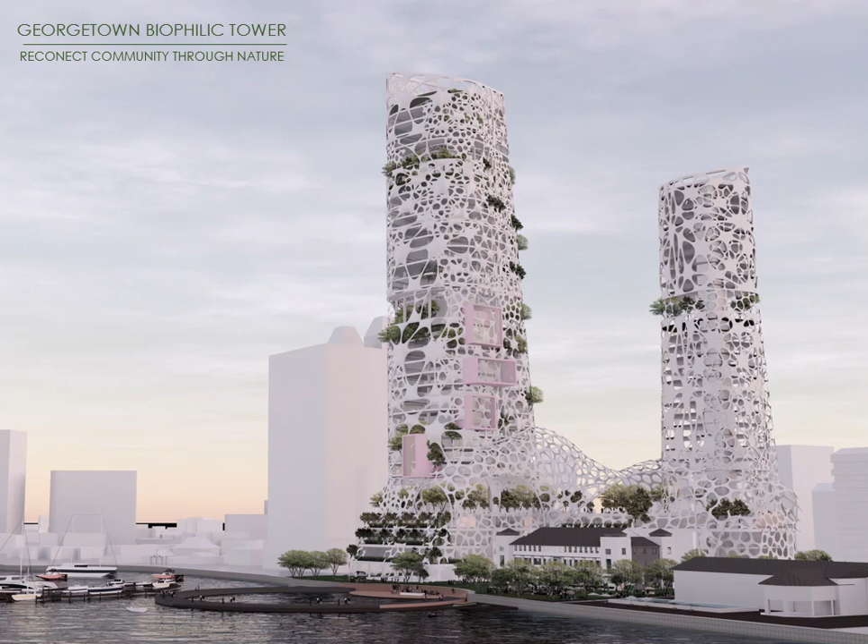Here's a brief introduction about green spaces that I would emphasize later on. High-density developments such as high-rise buildings can provide better local services, but also have more limited and low-quality green spaces, which may lead to a stronger feeling of insecurity and less social interaction than developments with lower density.

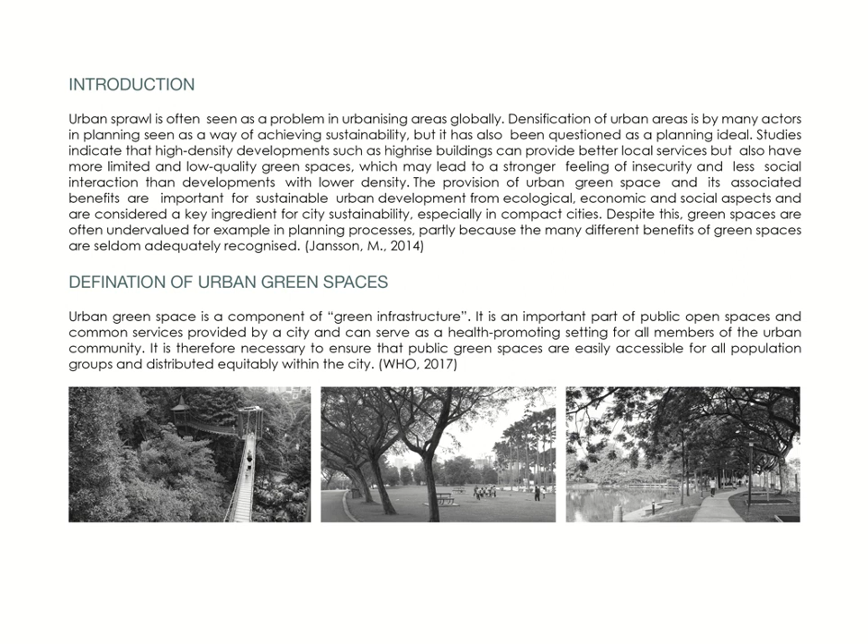Definition of urban green space: it is a component of green infrastructure, an important part of public open spaces and common services provided by a city, and can serve as a health-promoting setting for all members of the urban community. Therefore, it is very important for urban green space to be integrated into the city and as part of our lifestyle.

What's reflected globally is reflected in Malaysia also. In local context, ASEAN green spaces are disappearing fast. Our country is one of the countries globally that is strongly affected by this lack of green spaces.

Next is the local issue in Penang context: urban heat and climate change. Only 0.4% of building use is contributed to public open space. This is a very serious matter that we have ignored so far, the lack of green space in our city.

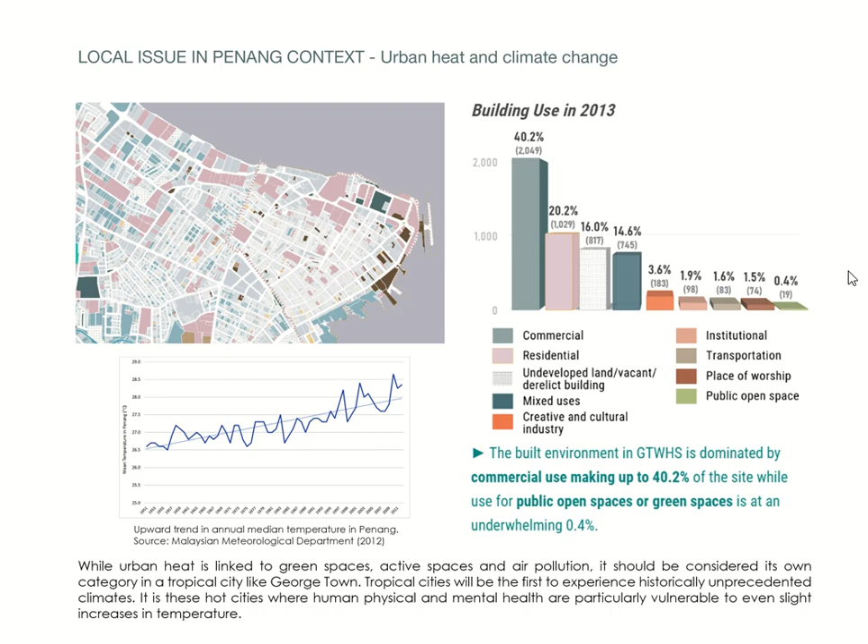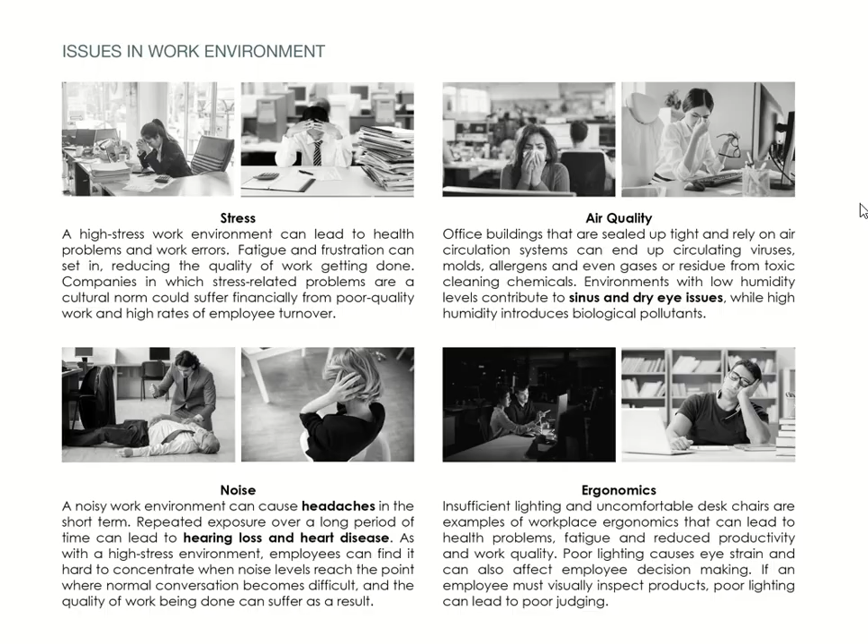Green space in and around office produces healthy workers. We all love green spaces—it is human nature to want to be near nature. As our cities densify and more of us live and work closer together, we understand that green space is a basic need that is in fact in decline in many urban environments.

So how do we improve the work environment? Firstly, encourage transparency, remodeling and redesign, use natural elements, increase engagement, foster teamwork and collaboration, and go for comfort.

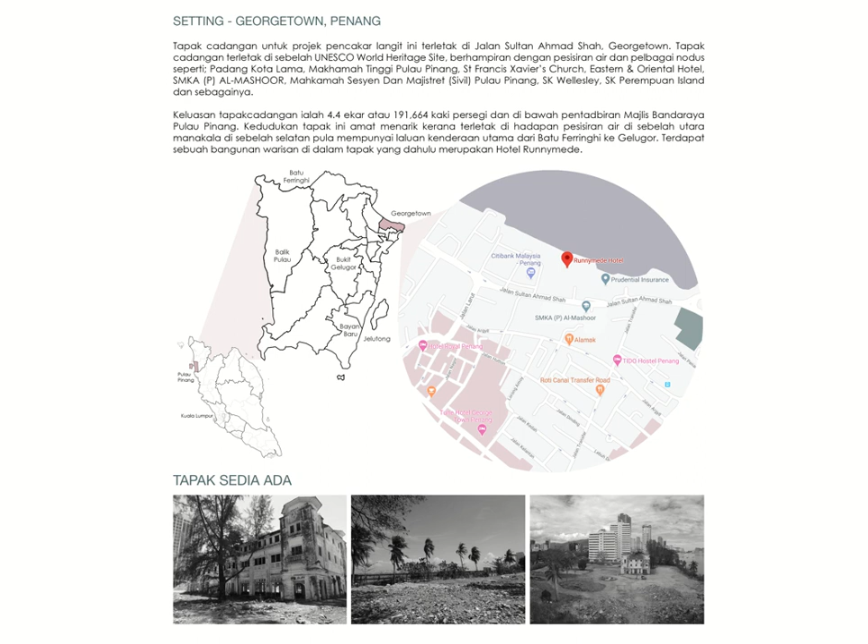This is the setting of our project this semester, Georgetown Penang. It is located between Citibank Malaysia and Prudential Insurance Building, sandwiched between the waterfront and Jalan Sultan Ahmad Shah. These are the existing pictures of the site, including the existing heritage building, Runnymede Hotel.

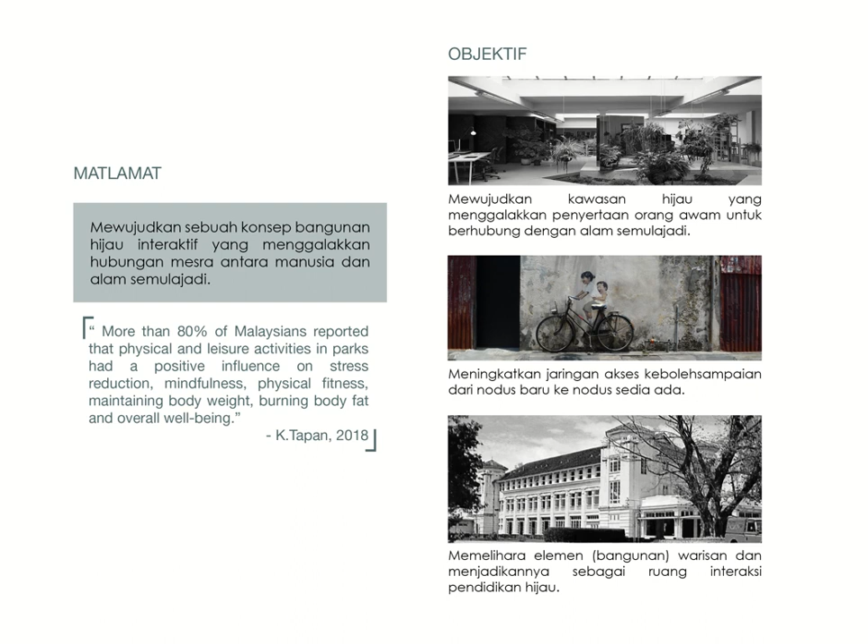So, I've mentioned about the lack of green space and the work issues in the work environment. I thought about how I can solve this true problem—it's by bringing nature into the building.

So what I've come up with is my design concept, Biophilic Tower, by inserting biophilic elements into my design. Biophilia as a concept can be loosely translated as love of nature.

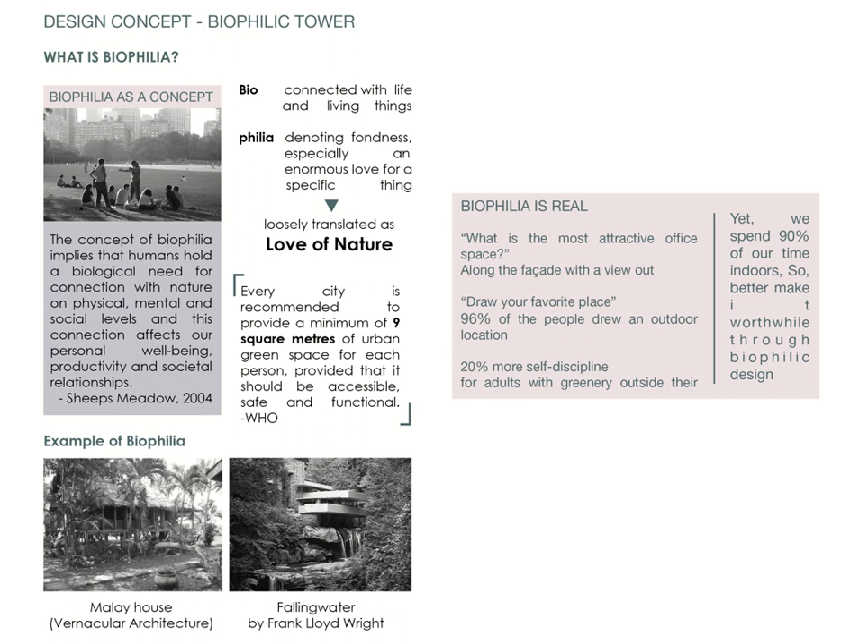Biophilia in an economic sense: there's great economic value in the positive effects of biophilic design on well-being, stress reduction, and enhanced learning. Biophilia can re-engage losses from unproductive operating costs. Some of what biophilic design can do includes healing and improving attention and learning, as well as a significant increase in property value.

People will pay 58% more for a property with a view to water, while people will pay 127% more for a lakefront property.

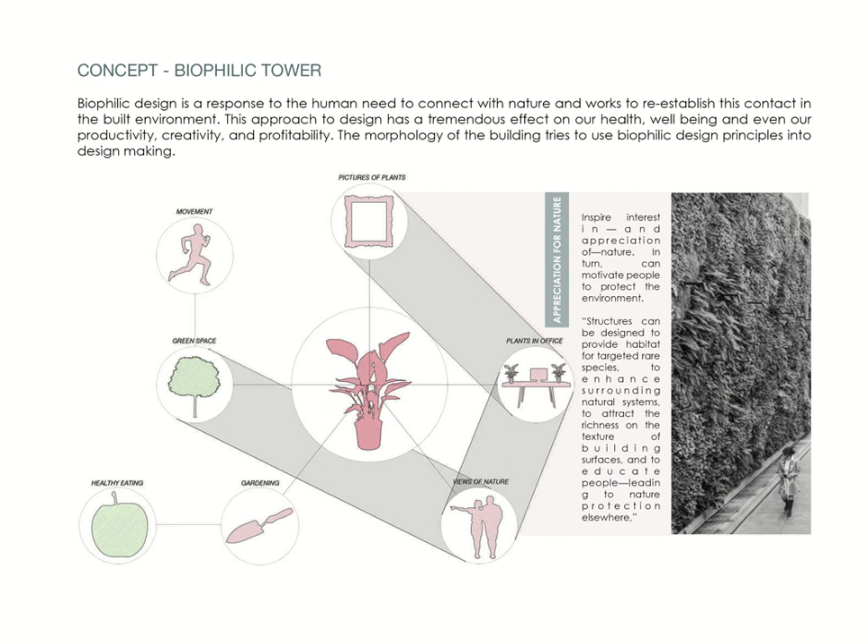Concept: biophilic tower. Biophilic design is a response to the human need to connect with nature and works to reestablish this contact in the built environment. This approach to design has a tremendous effect on our health, well-being, and even our productivity, creativity, and profitability. The morphology of the building tries to apply biophilic design principles into the design making.

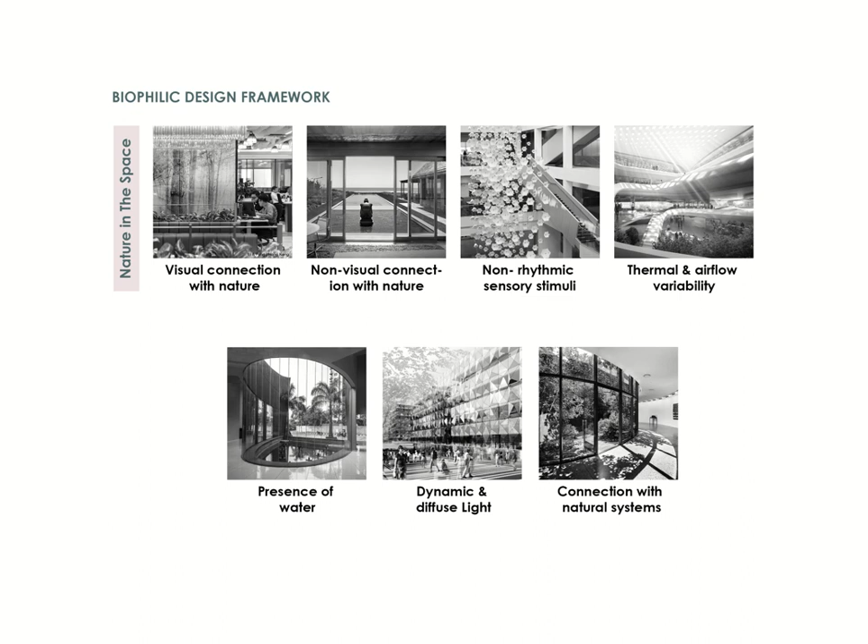These are the biophilic design frameworks that I have integrated into my design. Firstly, nature in the space: visual connection with nature, non-visual connection with nature, non-rhythmic sensory stimuli, thermal and airflow variability, presence of water, dynamic and diffuse light, and connection with natural systems.

Next, nature analogs—this relates more to the form of the building: biomorphic form and pattern, material connection with nature, and complexity and order. Then, nature of space, which is the experience of the space when you go into the biophilic design: prospect, refuge, mystery, risk, or peril.

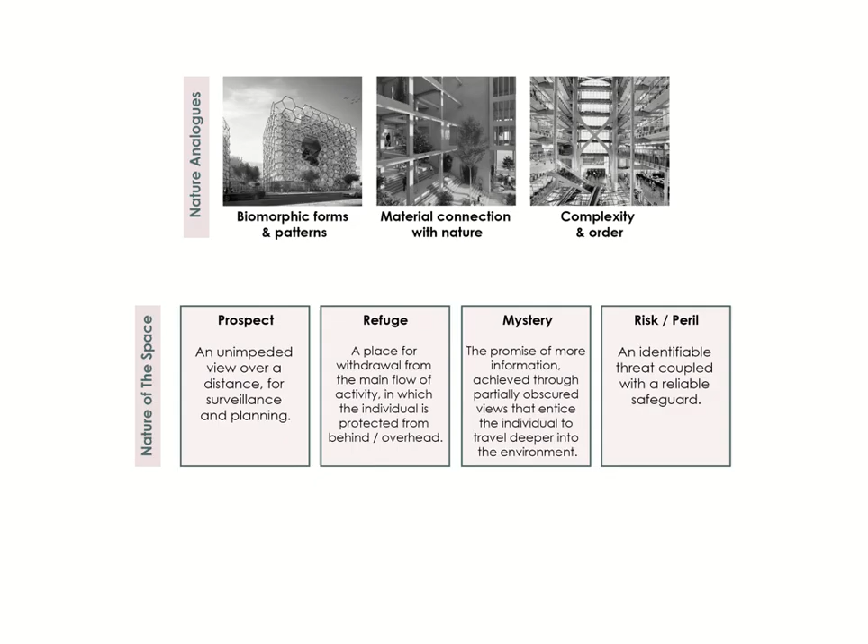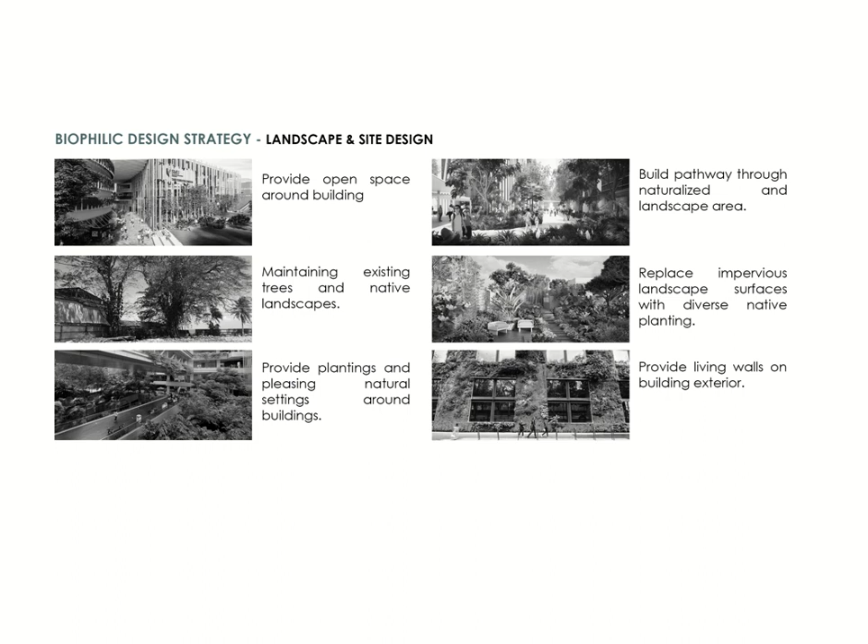Next, biophilic design strategy: landscape and site design. Provide open space around the building, maintaining existing trees and native landscapes. Provide plantings and pleasing natural settings around buildings. Build a pathway through naturalized and landscaped areas. Replace impervious landscape surfaces with diverse native plantings. Provide a living wall on building exteriors.

Biophilic design strategy, building design. These are some of the building design strategies.

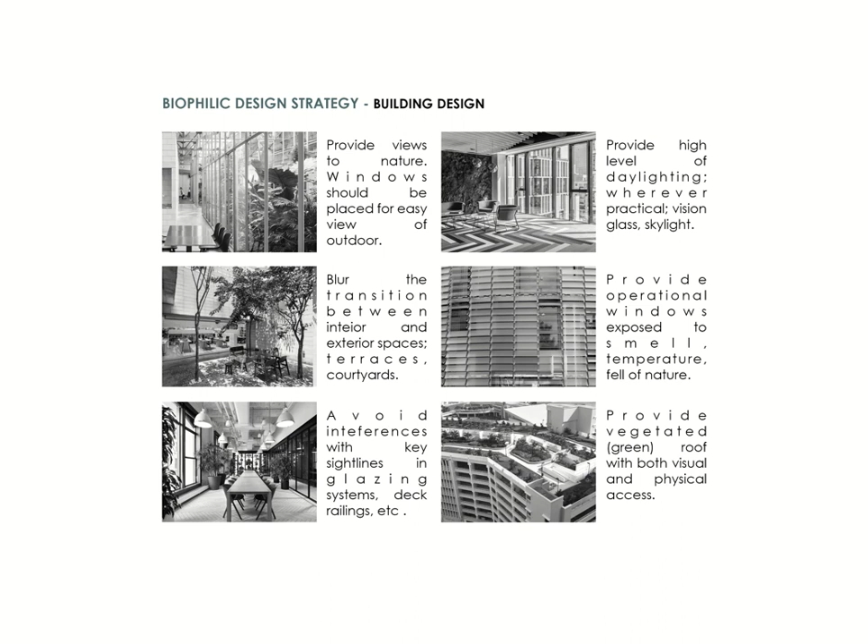So this is case study 1, Parkroyal on Pickering, Singapore, by WOHA Architects. This is what they've done towards biophilic design strategy.

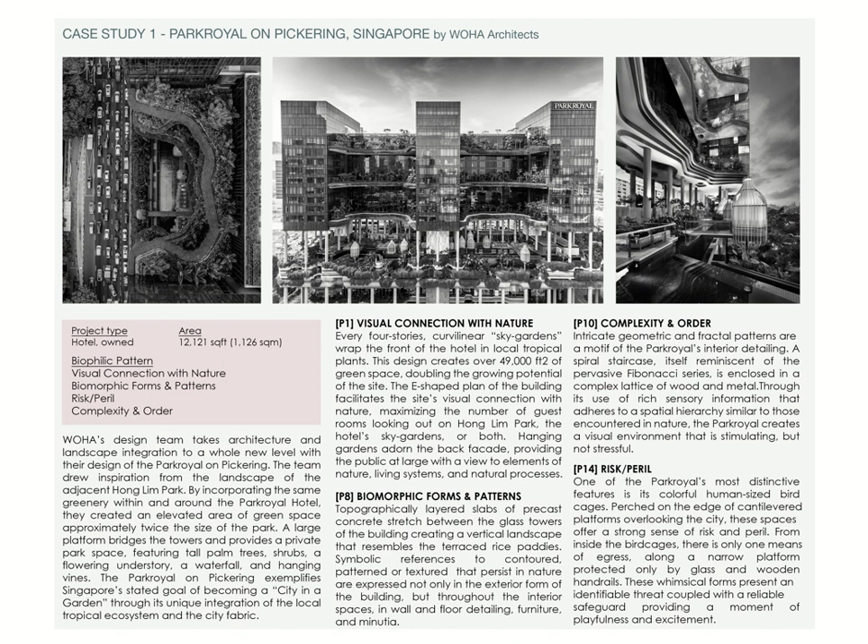What I want to highlight here is risk and peril. If you look at this cage, although when you step inside you feel you are in a very high-up environment that feels risky, you are actually in a safe environment. This is what they want to convey through this risk and peril experience.

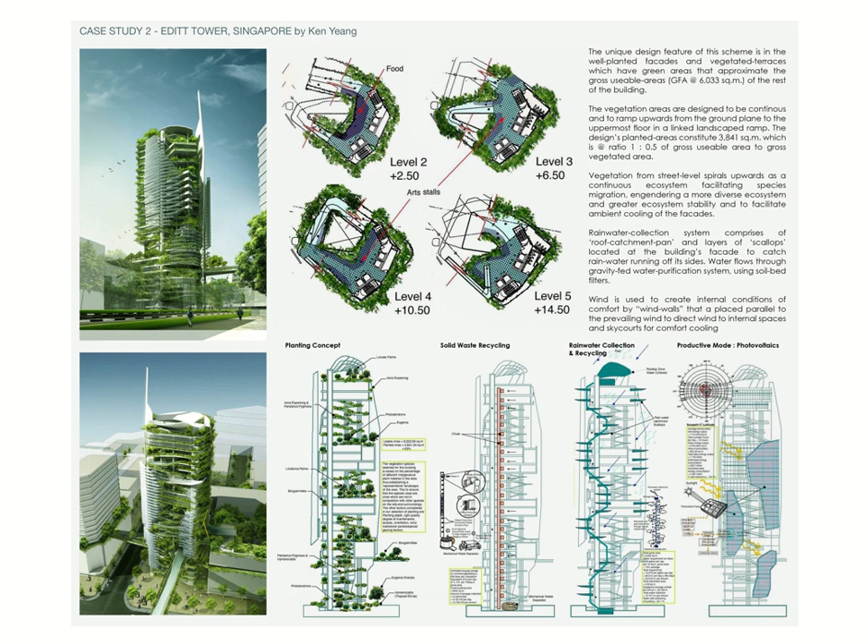So case study 2, EDITT Tower Singapore by Ken Yeang. This is also one of the designs where I've integrated the biophilia concept into it.

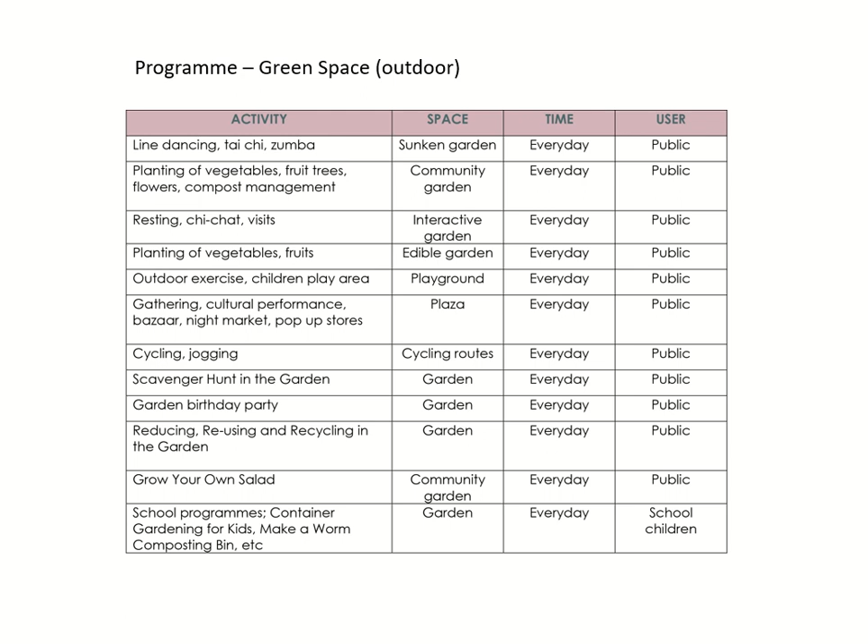Next, this is the program for the waterfront.

So from the concept, biomimicry approaches nature as a guide for design. I thought about how I can insert biophilia into my design, which is by incorporating nature, bringing nature into the building.

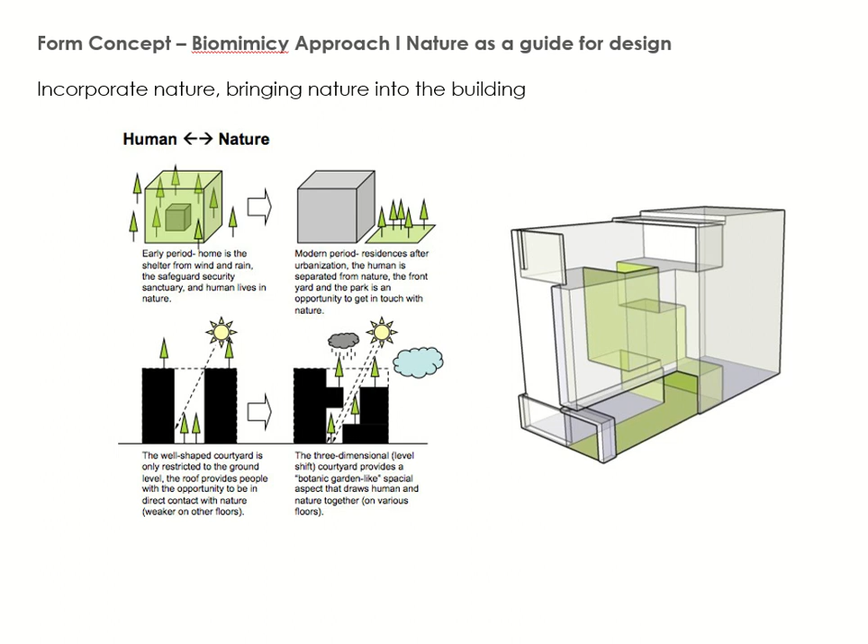As you can see, we not only want nature on the ground level, but I want to integrate it throughout the building, including the tower, by having these staggered green spaces. So, design direction: nature analogs, biomorphic form and pattern.

After integrating nature in the building, on second thought, what's the biggest surface of a building? It's the facade. So how do I incorporate biophilia into the facade of my podium and tower? It's by developing a facade that mimics trees, a biomimetic facade, through the biomorphic pattern of the cell structure, which comes out as a Voronoi facade.

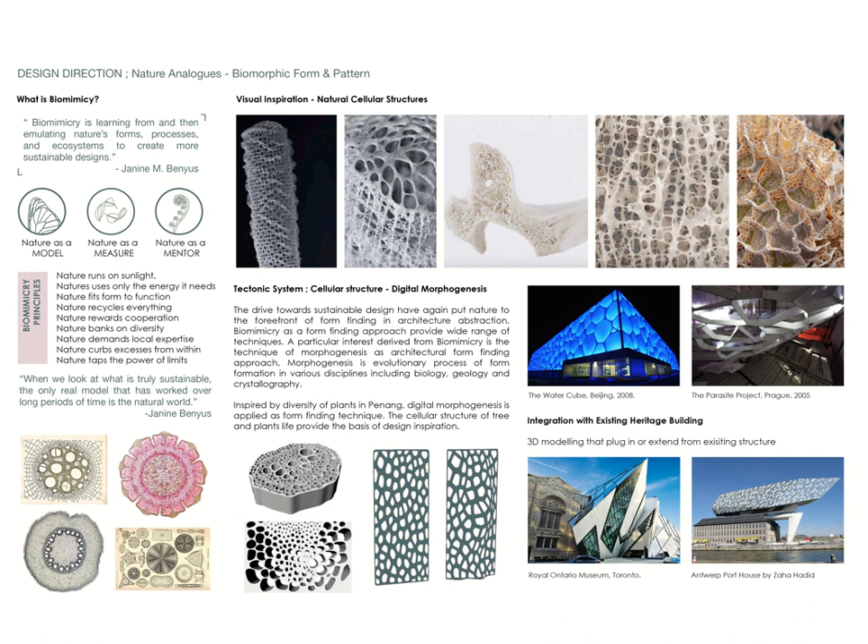So how does this cell structure facade mimic a tree? These are the developments of the cell structure that I've developed, and so I've come up with this Voronoi facade.

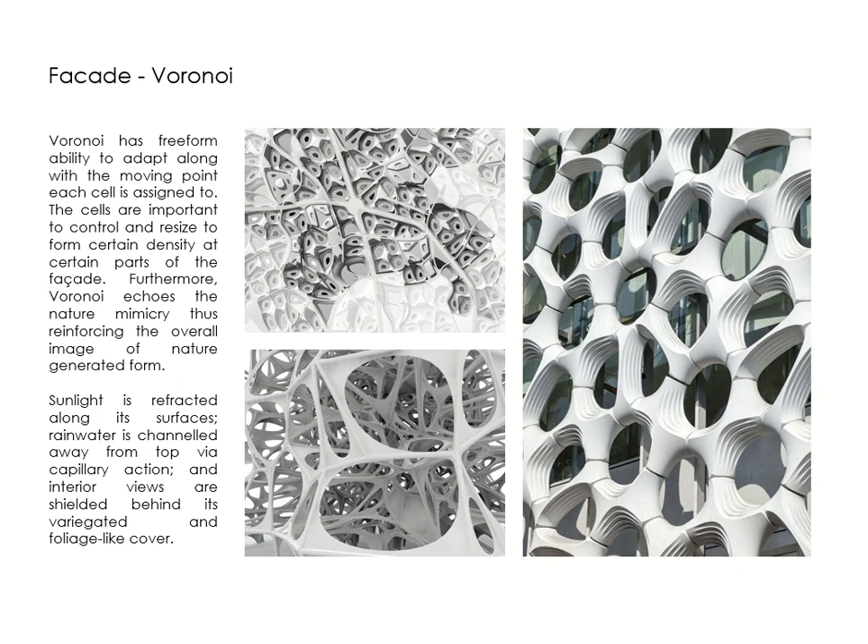So like I said just now, how does this facade act as a biomimetic facade that mimics a tree? I've done some case studies on materials that help in what a tree does, which is by absorbing pollutants in the air.

So here's how it works: by coating titanium dioxide into my facade, the sun activates the titanium dioxide particles of the coating and converts pollutants like nitrogen oxides and volatile organic compounds in the air into water and calcium nitrate, which is a salt. So this process is like what a tree does in our natural ecosystem, eliminating pollutants in the air.

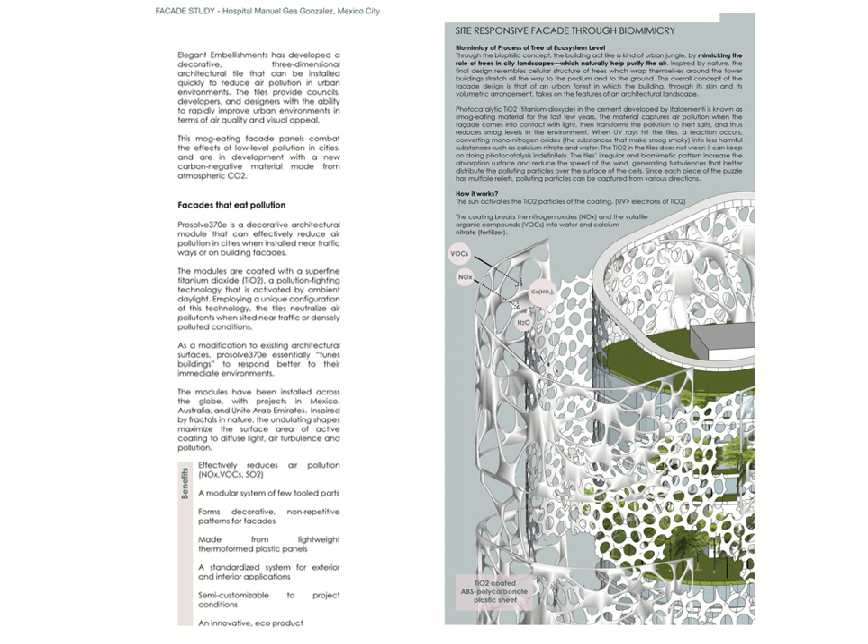So what's the greater use of this product if we don't use it throughout our building? So this is biomimicry of the process of a tree at the ecosystem level — it mimics the role of trees in the city landscape, which naturally helps purify the air.

So, design strategy in the urban context. Firstly, permeability: different access to the site from alternative entrances increases physical permeability to the site. Visual permeability to the waterfront and heritage building from Jalan Sultan Ahmad Shah is achieved through building massing.

Okay, legibility. Overflow of activities is introduced as new nodes, especially at the center of my site along Jalan Sultan Ahmad Shah, increasing legibility in terms of activity patterns. Public relevant activities act as sequence markers continuously until the waterfront from outside the site.

So accessibility to the site is introduced not only along Jalan Sultan Ahmad Shah but also from surrounding buildings. A pedestrian path is introduced from the Citibank building and Prudential building at the waterfront area.

So the block arrangement of the building is based on the existing solids and voids of the macro site. The existing heritage building on the site is preserved through the Penang Heritage Preservation Policy. New blocks are set away from the building to encourage the public to appreciate the heritage building.

Robustness: to increase robustness, edge activities between retail spaces at the ground floor overflow to public space, plaza, garden, and waterfront. The plaza, waterfront, garden, and amphitheatre are designed to house different activities on demand.

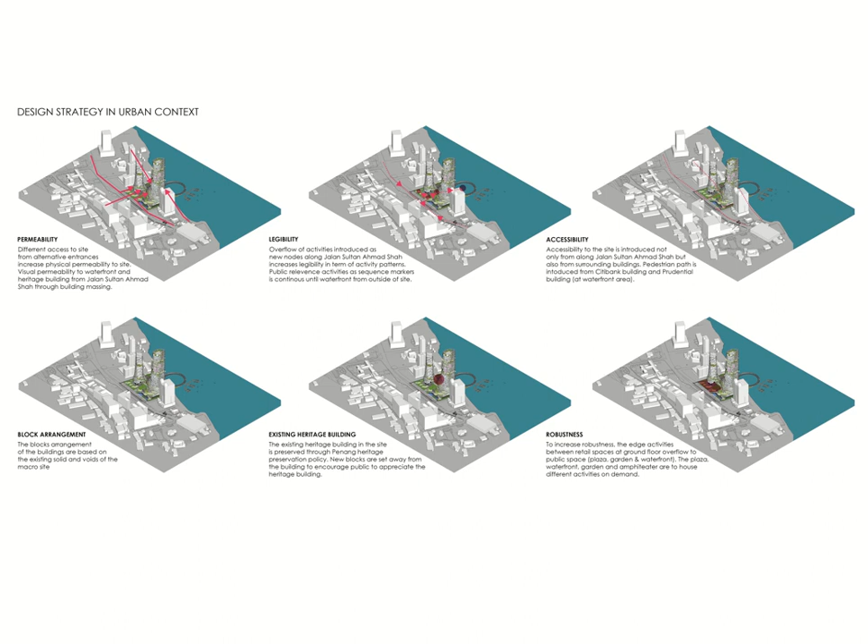Next, variety: traffic zoning, richness, green spaces, building program. So the program of building and spaces act as a therapeutic escape for users by implementing biophilic strategies.

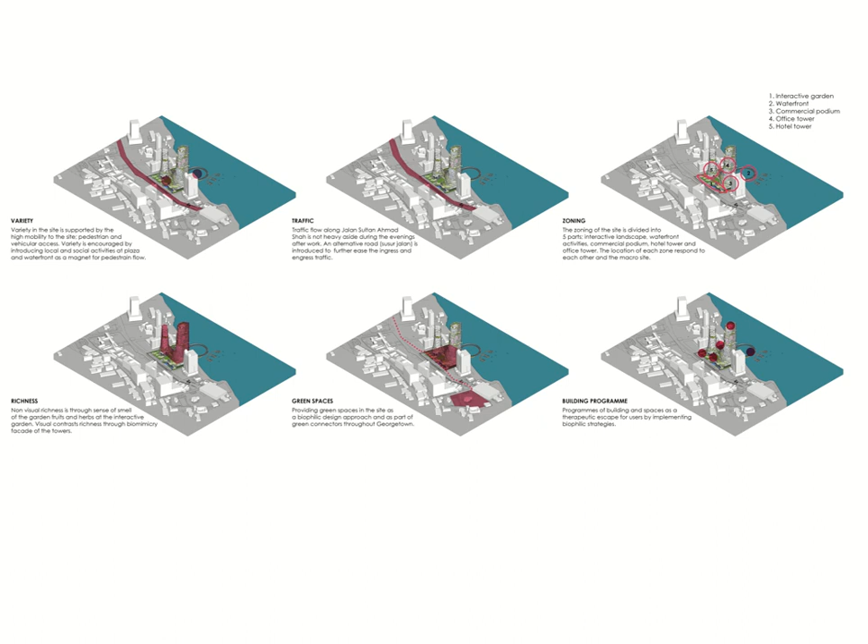The zoning of the site is divided into 5 parts: interactive landscape, waterfront activities, commercial podium, hotel tower, and office tower. The location of each zone responds to each other and to the macro site.

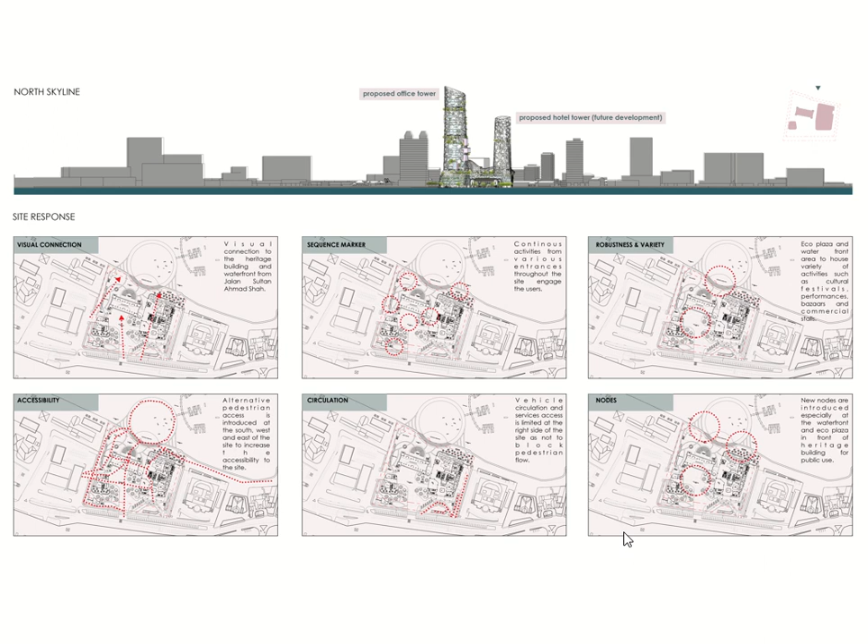Okay, accessibility: alternative pedestrian access is introduced at the south, the west, and the east of the site to increase accessibility. Vehicle circulation is limited to the lower right side of the site so as not to block pedestrian flow. New nodes are introduced, especially at the Waterfront Eco Plaza in front of the heritage building, for public use.

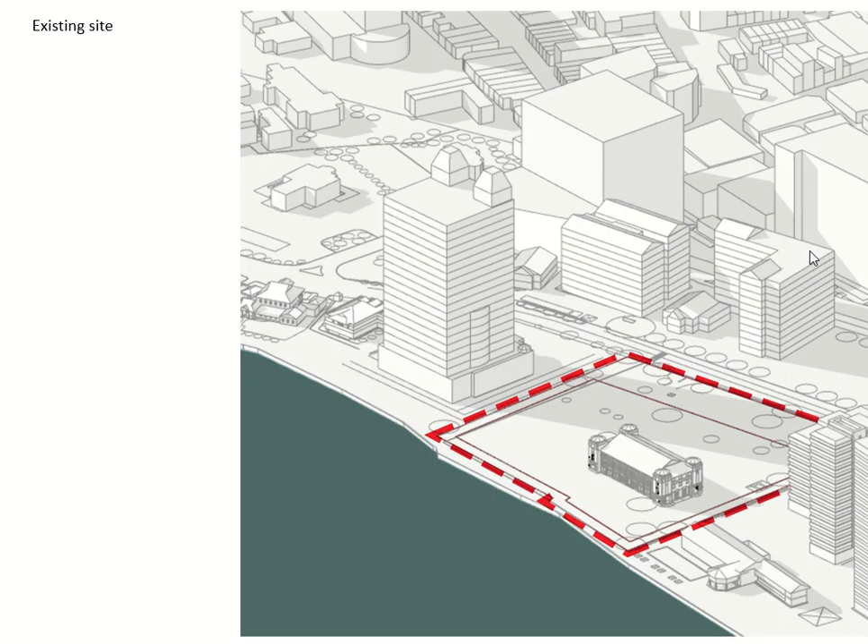The building is elevated to increase visual permeability to the waterfront, so the building is divided into smaller parts. The building rises for sky courts, staggered green spaces, nature in the space, and visual connection to nature.

These cantilevered spaces are the experience I mentioned in the case study of Park Royal — when you enter, you look down, you're in a very high up space, but you know that you are in a safe space.

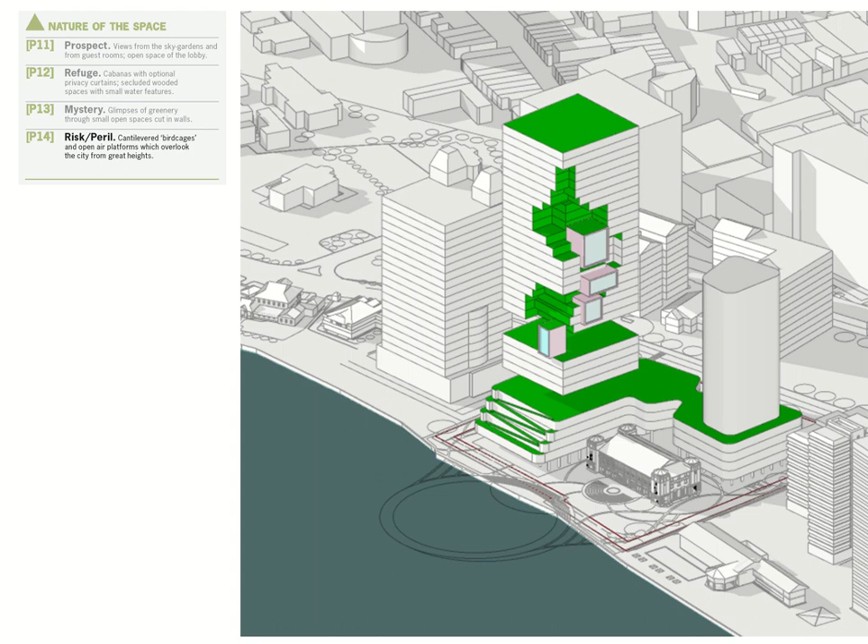The building core is located at the center to maximize the view, with visual connection to nature by integrating another sky court.

By implementing landscape throughout the building, nature is brought into the space. Lastly, by integrating the facade explained earlier, as part of nature analogs, biomorphic form and patterns.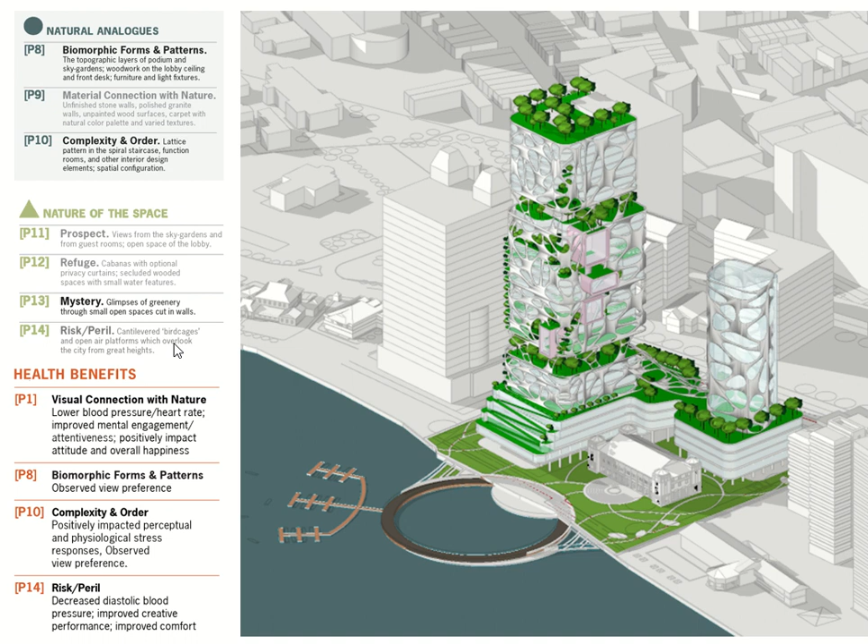The health benefits of all this biophilic design include lower blood pressure, observed view preference, positive impact on perceptual and physiological stress response, and decreased diastolic blood pressure.

Okay, this is my final design.

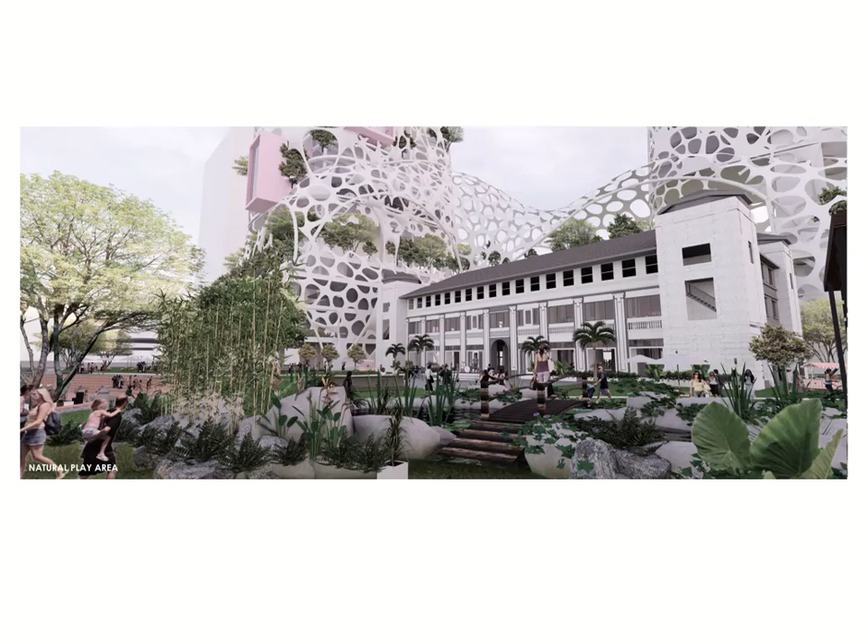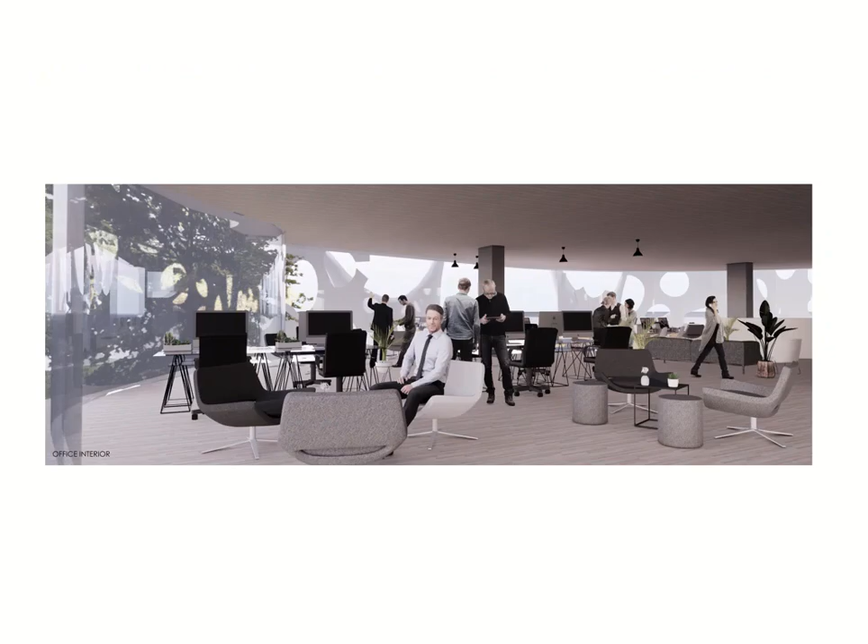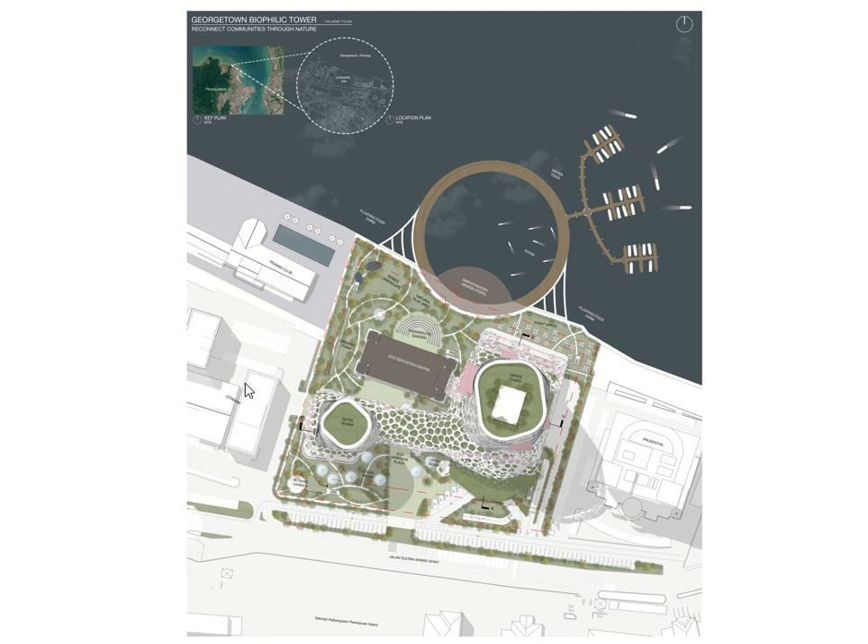This is my site plan. As you can see, from Jalan Sultan Ahmad Shah, if you walk here you can directly see the heritage building — it's like you're invited into the heritage building and through it to the waterfront area. And from the Citibank here, you can connect into the site.

I'll show the ground floor. From Jalan Sultan Ahmad Shah, a pedestrian walkway invites you into the building, into the Eco Plaza as a centralized node that connects to the heritage building, the commercial area, another commercial area, and the waterfront.

From the Citibank, it is connected to the commercial area and to the central node, and to another commercial area, the waterfront, and the heritage tower. So it's like a seamless circulation throughout the site.

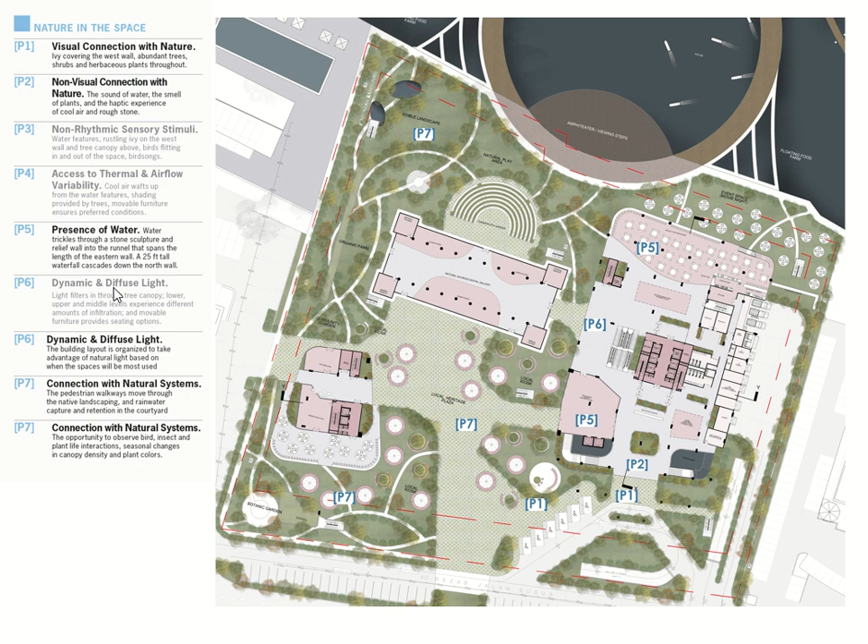I've also implemented biophilic design here, as you can see from the numbering.

After the ground level, in response to the sustainability effort, I've introduced some commercial spaces and businesses that make an effort towards sustainability in our environment. These are some examples of targeted tenants.

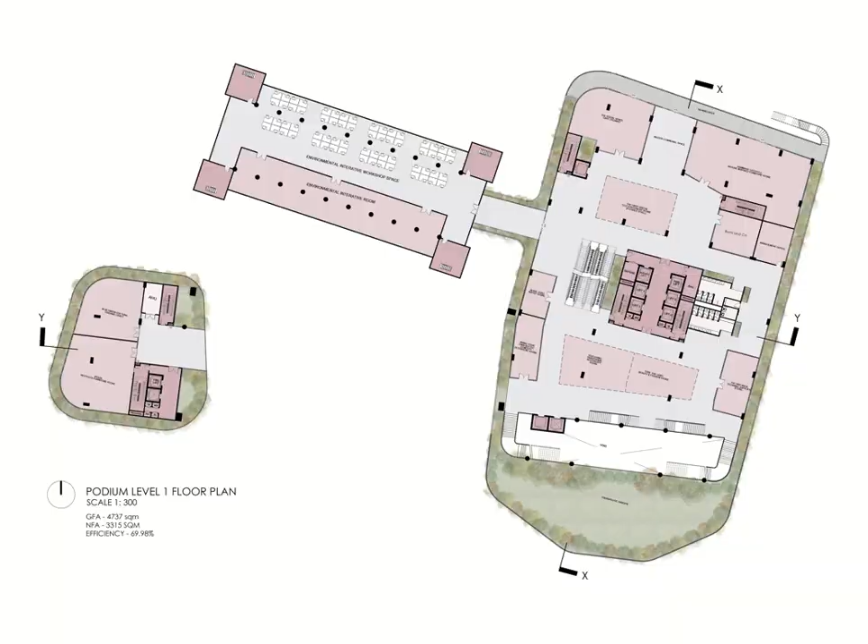This is my podium level 1. Biophilic office design brings nature into the workspace, so for my proposed office tower, I would like to have the framework integrated into my tower.

This includes access to nature, light, and view of the outside; utilizing available outside areas; giving staff space and choice; incorporating nature features like wood and stones; including plant life into the workplace; and using embrace color.

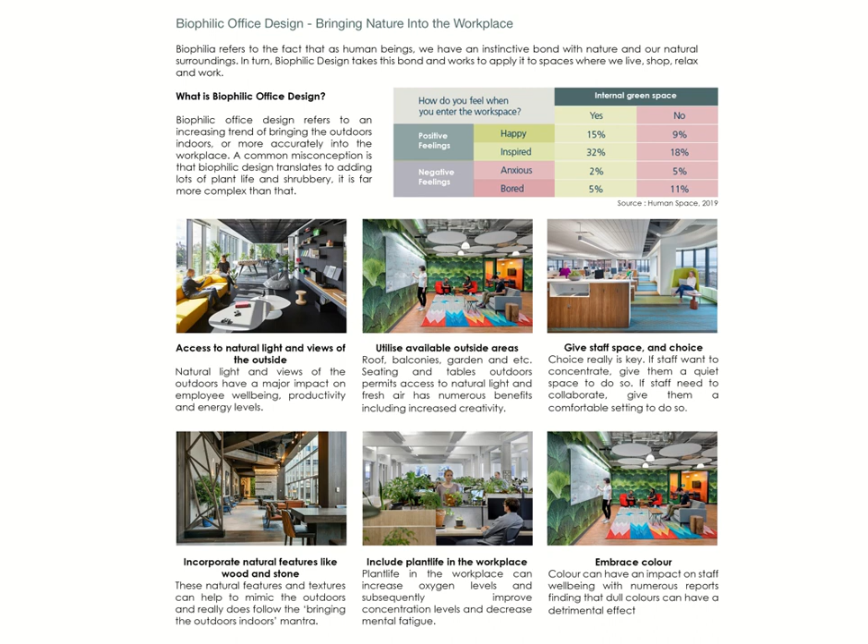Here are the top 5 elements most wanted in office spaces: natural light, quiet working space, a view of the sea, live indoor plants, and bright colors.

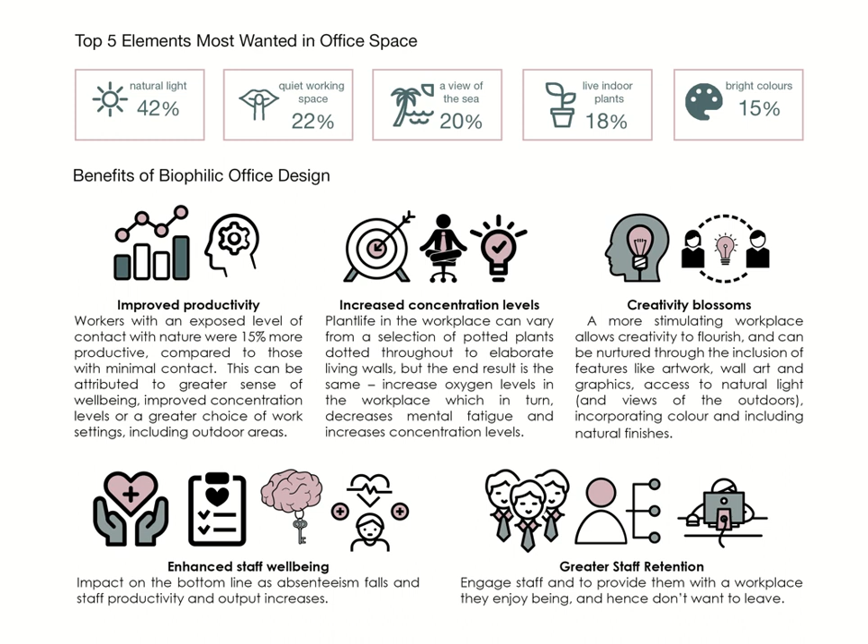Benefits of biophilic office design include improved productivity, increased concentration level, blossoming creativity, enhanced staff well-being, and greater staff retention.

More millennials are flocking to shared office space. What is a shared office space? It's actually open office spaces that support startups, resistant to the traditional office, offering networking opportunities, lower cost, fewer responsibilities, and smaller commitments. This craze isn't just among millennials.

84% of employees believe that this strategy helps companies recruit and retain top talent. 72% of workers think that flexible workspace strategy has helped motivate workers. These are the open office environment benefits.

So this is the office plan — I've also integrated biophilic elements. It is an open office plan integrated with nature.

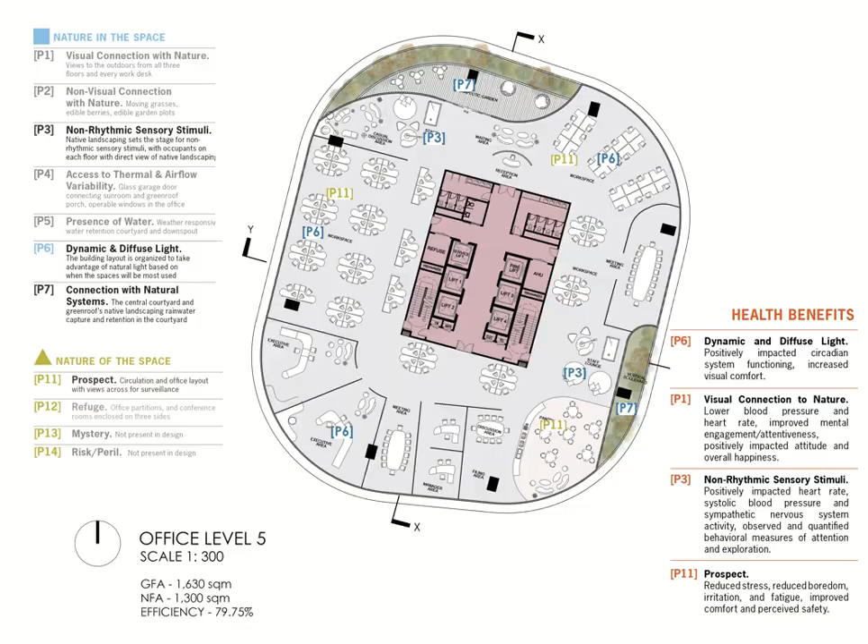These are the sections and details: Sky Garden details and EcoCells details. These EcoCells details I've integrated into the basement plan, where the trees go all the way up to the ground floor.

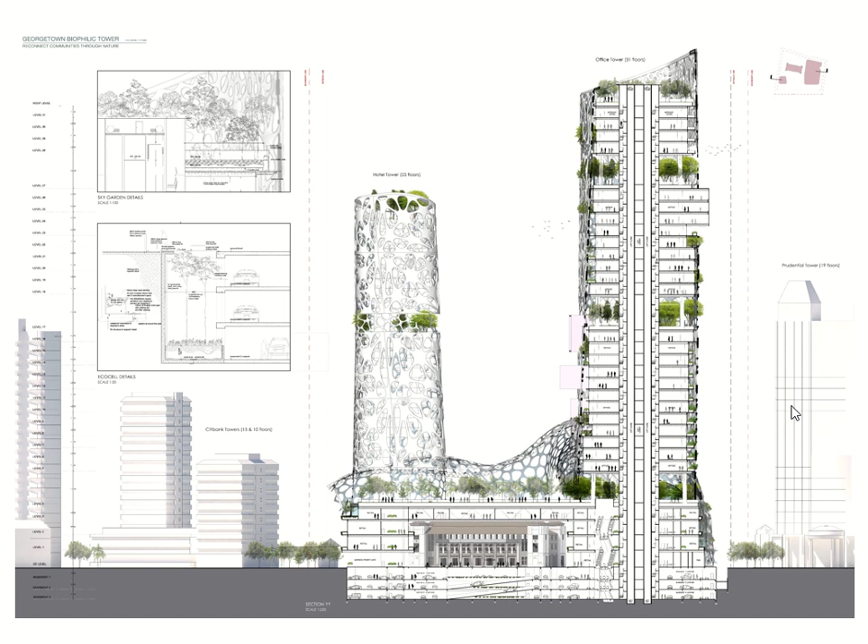It can also act as a ventilation strategy and daylighting strategy. So this is another section: my north, south elevation, and west and east elevation views.

As for my structure case study, I've chosen the Shanghai Tower, which uses the core and outrigger structure.

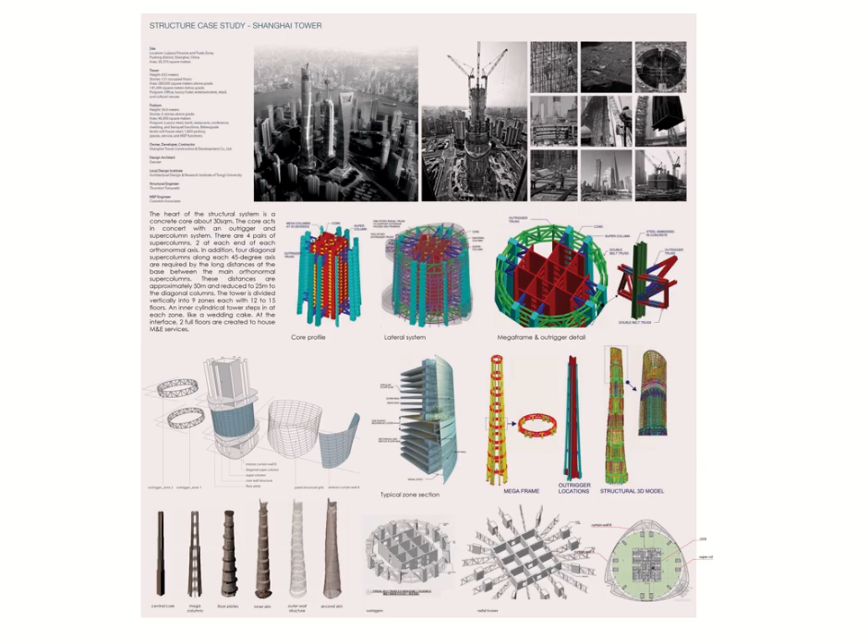These are the construction strategies of my building's structure, and this is the integrated building technology of my building.

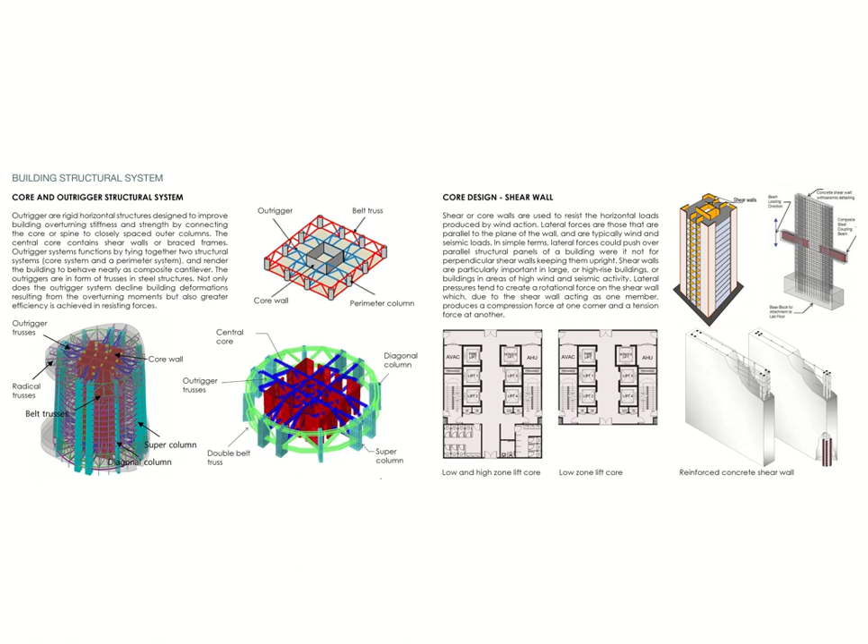The building structure system uses a core and outrigger structure system with a core design shear wall. The floor tight raised floor system uses an underfloor air distribution system, with floor tight composite floor construction.

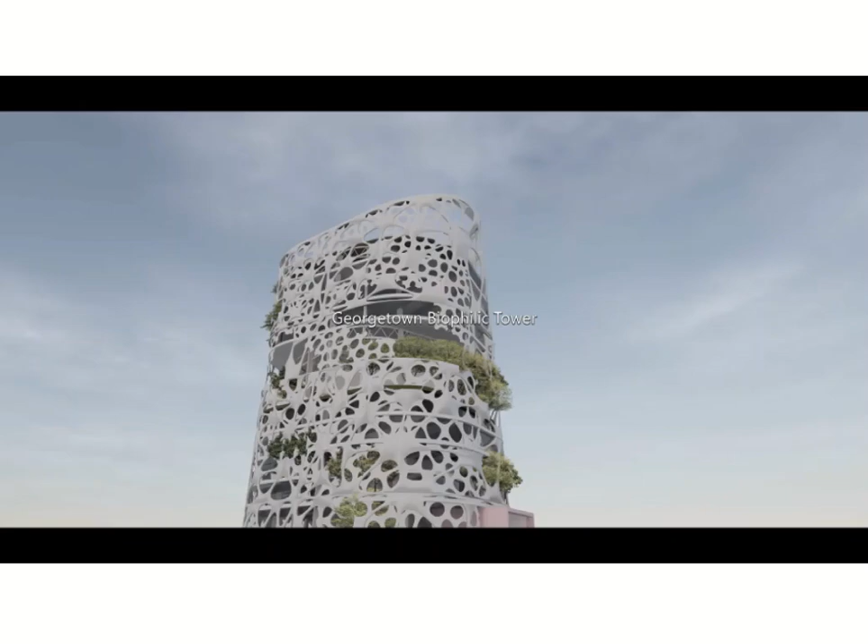Before I end my presentation, here's a short video of my design.